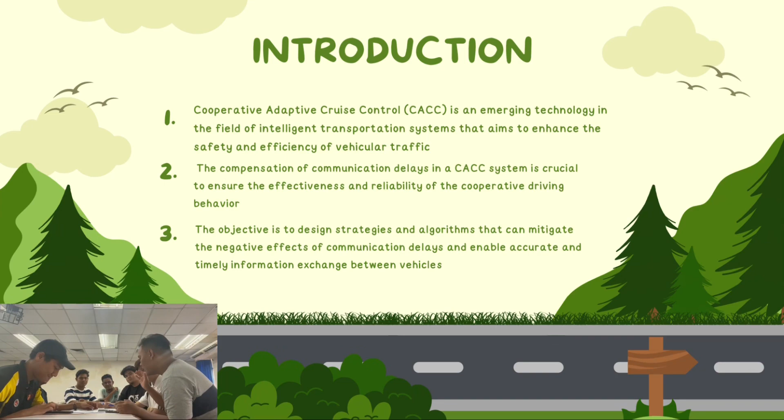We discuss the Group Project 1, Dynamical System. Our Group Project 1 in Dynamical System is on the Routh-Hurwitz criterion. Our chosen topic is compensation of communication delay in a cooperative ACC system. What is an ACC system? The system relies on real-time communication between vehicles to enable coordinated driving behavior and improve traffic flow. However, communication delay significantly impacts the performance and effectiveness of this system.

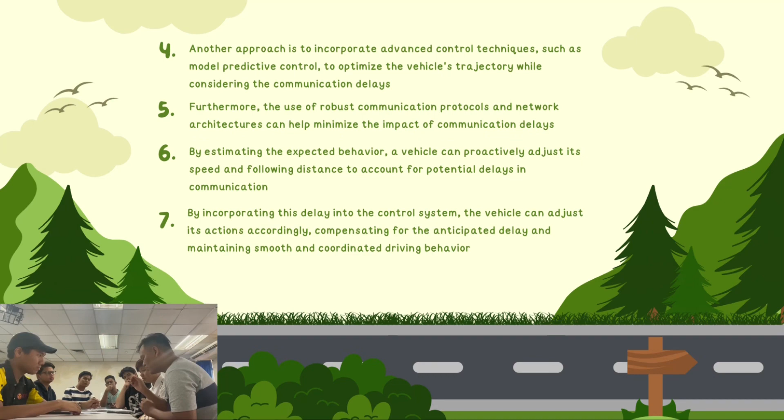For example, if vehicle A predicts that vehicle B is likely to decelerate due to an obstacle based on its previous behavior, it automatically initiates braking to maintain a safe following distance. This prediction and compensation process helps mitigate the impact of communication delay, ensuring that the platoon remains safe and responsive. In summary, the compensation of communication delay is a critical aspect in the development and implementation of cooperative ACC systems on vehicles; by addressing communication protocols it is possible to mitigate the negative effect of delay.

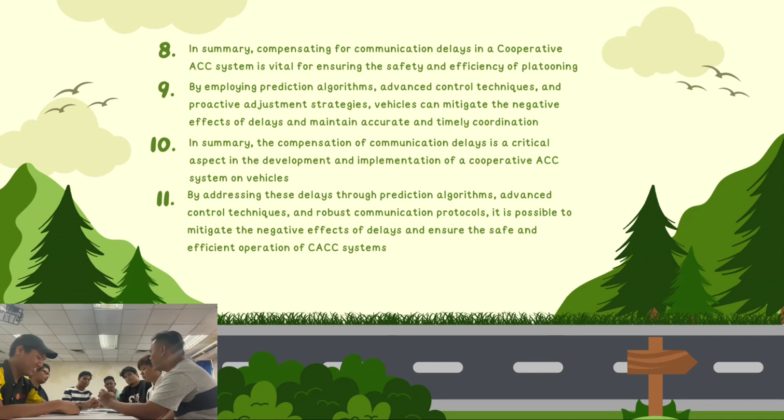What do you think about the problem statement? Okay, my problem statement is as follows. First, the problem addressed in the study revolves around the impact of communication delay on the stability and performance of cooperative adaptive cruise control, the CACC system. Second, communication delay refers to the time lag between sending and receiving information through a communication system. Third, it has been established that such delay can significantly hinder the effectiveness of CACC systems, resulting in poor performance, particularly in real-world scenarios with extreme communication delay.

Lastly, the focus of this study is modeling and control of a cooperative adaptive cruise control system, the CACC system. So, based on your problem statement, the objective of this study is to enhance the stability of the CACC system by mitigating the adverse effects caused by communication delay. The second objective is to understand the relationship between communication delays and system stability and develop strategies to improve performance under various traffic conditions. And the last one is to contribute to the development of reliable and robust CACC systems that can operate efficiently even in the presence of communication delays.

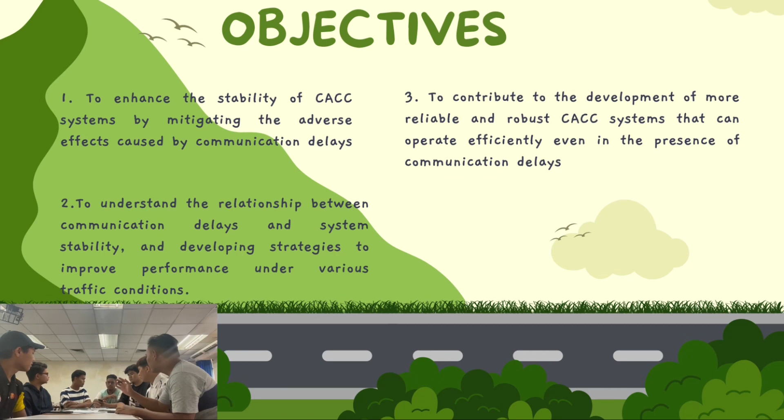Okay, next we continue with the methodology. Before we understand the Routh stability criterion, there are three types of system: the stable system, where all roots lie on the left side of the S-plane; the unstable system, where roots lie on the right side of the S-plane; and the marginally stable system, where roots lie on the imaginary axis of the S-plane.

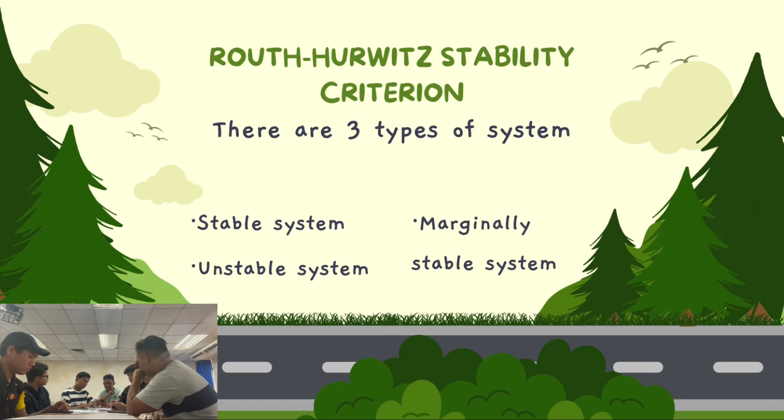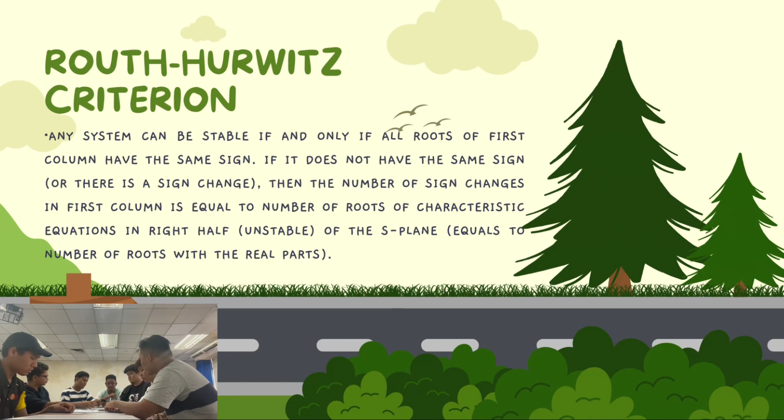The criterion states that a system is stable if and only if all elements of the first column have the same sign. If they don't have the same sign, or there is a sign change, then the number of sign changes in the first column is equal to the number of roots of the characteristic equation in the right half, or unstable region, of the S-plane, which is the number of roots with positive real parts. We can consider the characteristic equation.

There are some necessary conditions to make the system stable: all coefficients of the equation should have the same sign, and there should be no missing term. But there's no assurance that the system is stable just by referring to these properties. To do this, we need to apply the Routh-Hurwitz criterion to assess the system stability. The system is said to be unstable if the predetermined condition is not met.

There are a few advantages of this criterion: we can find the stability of the system without solving the equation, we can determine the relative stability of the system, we can determine the range of K for stability, and we can determine the point of intersection of the root locus with the imaginary axis. There are also a few limitations: the criterion is only applicable to linear systems.

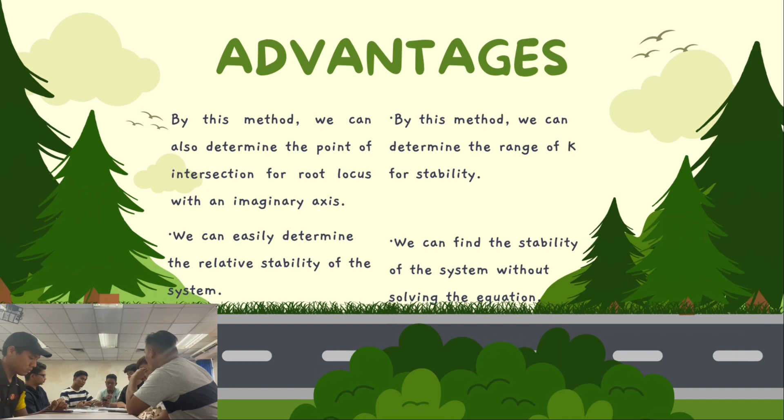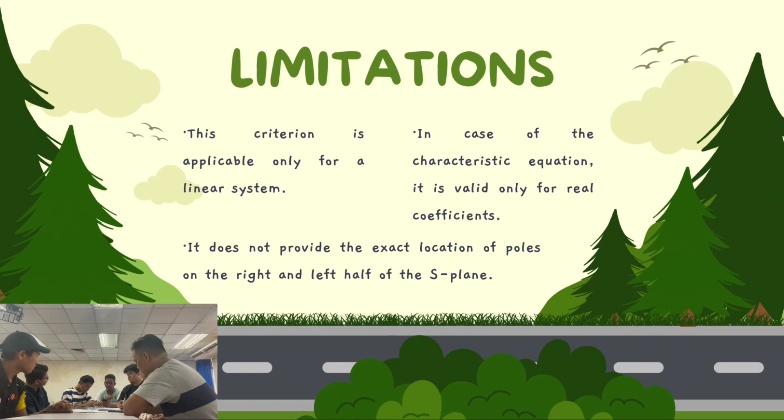It does not provide exact location for the poles in the right half of the S-plane, and in the case of characteristic equation, it is only valid for real coefficients. So there are 4 steps for this Routh-Hurwitz stability criterion.

The first one is to arrange all the coefficients of the equation in 2 rows. Then from these 2 rows, we will form the 3rd row. Now we shall form the 4th row by using the 2nd and 3rd row. Then we can continue this procedure for forming a new row. So let's continue with the solution.

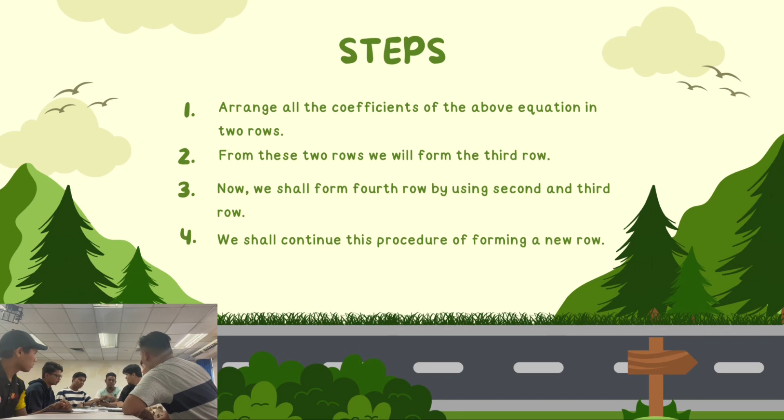Yes, the solution. What do you think? I actually think that we can solve the problem by using the transfer function method. So as we can see from the slide, we have Q, V and A equations.

Whereas AI is the actual acceleration of the vehicle, and theta I represents the vehicle actuator delay, and the third equation, which has the tau there, represents the driveline dynamics, where tau is a time constant. Consequently, the transfer function G(s) from desired acceleration UI to QI reads as this formula.

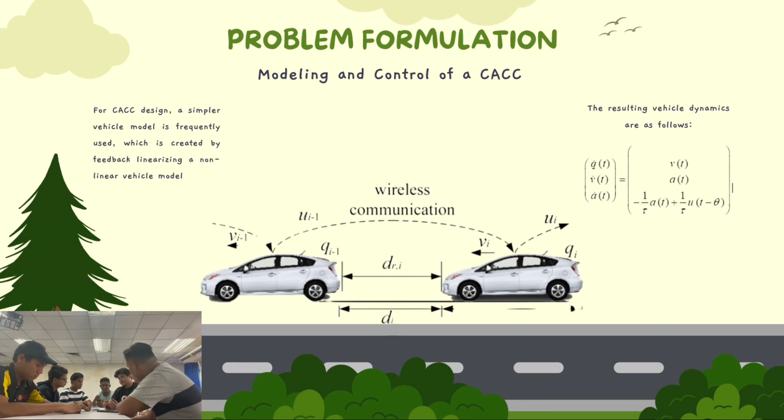On the next slide we have the first equation, where S is the Laplace variable, UI and QI denote the Laplace transform of UI and QI respectively. So for the first equation, we can see where S is the Laplace variable, UI(s) and QI(s) denote the Laplace transform of UI(t) and QI(t).

So for the next equation, which is the second equation, a constant time gap spacing policy improves string stability, and the desired inter-vehicle distance DRI between vehicles involves a standstill distance RI and a velocity dependent part.

So the next step is the third equation, which is the time gap case for a homogeneous CACC string, actual inter-vehicle distance DI. So we continue with the next equation, which explains that to realize the vehicle following objective, the inter-vehicle distance error EI is defined as the equation.

So for the next equation, the controller is adopted, where a pre-compensator with input xi I is introduced. For the sixth equation, to stabilize the dynamics, the control law for xi I.

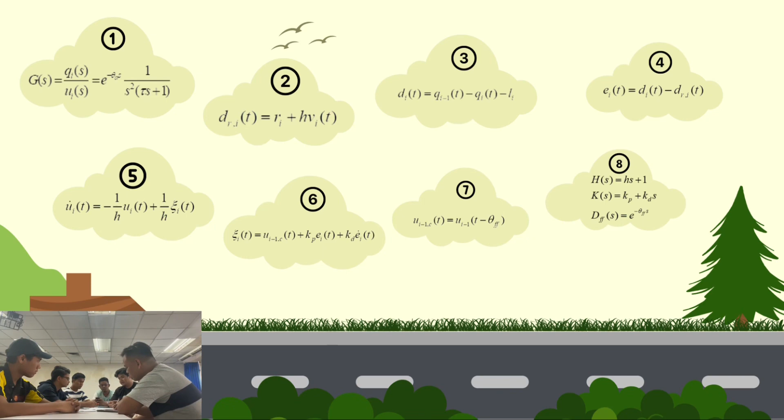For the seventh equation, it states where Kp and Kd represent the controller parameters, Ui minus 1 is the received desired acceleration of the preceding vehicle. And the eighth equation, which has the H, K and D, explains that without loss of generality, we choose Ri, Li equal to 0 when analyzing stability and string stability. That's why the CACC system of homogeneous interconnected vehicles is string stable.

And the last one we can see from the slide is considering, for instance, the desired acceleration, the transfer function for S(s) from UI-1 to UI. As you can see from the slide, here we have the block scheme of the one vehicle look-ahead CACC system. Here we introduce the string stability of this one vehicle look-ahead CACC system, adopting the so-called performance-oriented approach, which is characterized by amplification in upstream direction of the signal of interest.

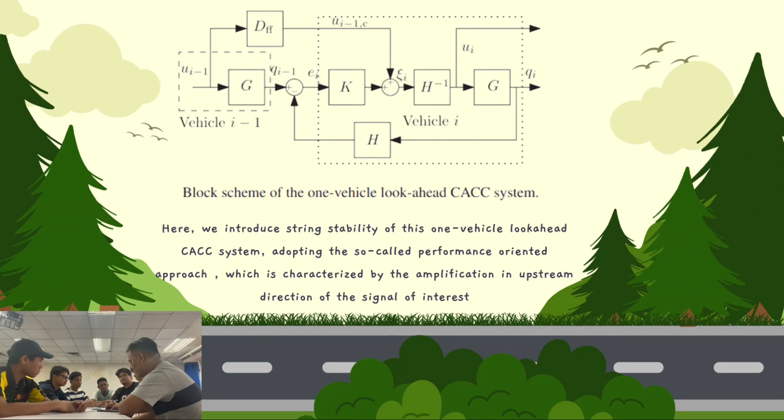So we can go to the problem solution, which actually uses the dynamical system approach. So Johan, do you mind to explain? So as for the example and solution, I already provided the solution. So basically for the solution, firstly we have to provide a few equations that satisfy the form of x dot is equal to f(x).

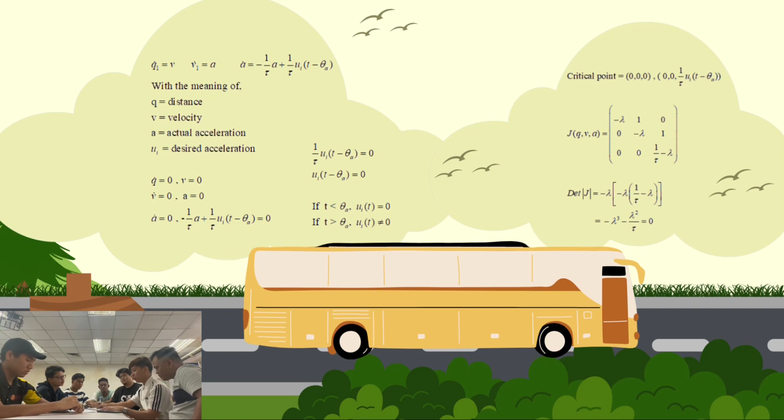So I found three equations related to our research, such that q dot is equal to v, v dot is equal to a, and a dot is equal to negative 1 over tau a plus 1 over tau ui(t minus theta), such that q is distance, v is velocity, a is actual acceleration, and ui is desired acceleration. So for the first step, for the Routh-Hurwitz method, we need to find the equilibrium point, such that firstly we need to set q dot equal to 0, so we will get v is equal to 0.

Then we find for v dot equal to 0, and then we're going to get a is equal to 0, and lastly a dot is equal to 0. Then we will get 1 over tau u_i(t minus theta a) is equal to 0. So based on the paper that I have followed, if t is less than theta a, then u_i(t) is going to be 0. Then if t is more than theta a, then u_i(t) will be not equal to 0.

So based on the condition, I already get the equilibrium point or the critical point is (0, 0, 0), referring to the coordinates of q, v, and a. So for the next step, we're going to find the Jacobian matrix, and then we're going to substitute the equilibrium point into the Jacobian matrix. Then for the diagonal of the Jacobian matrix, after we substitute the values, we're going to subtract lambda to find the eigenvalues. After we finish that step, we're going to find the determinant of the Jacobian and equate it to 0.

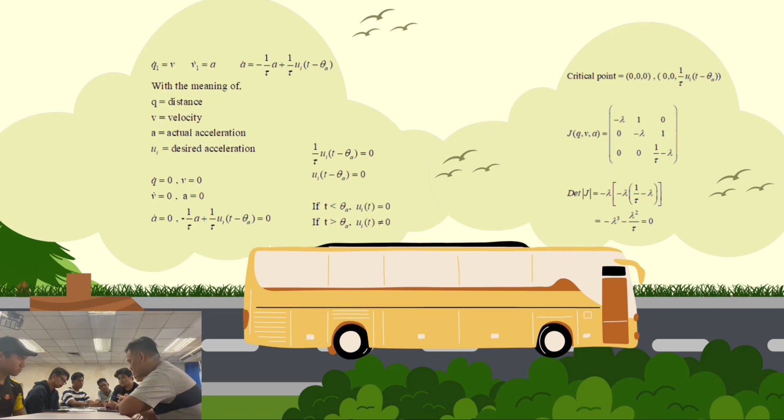Then we're going to get the characteristic equation, which is lambda cubed plus lambda squared over tau is equal to 0. So based on the Routh-Hurwitz criterion, we compare the characteristic equation with the general form of the characteristic equation, such that we get a1 is equal to 1 over tau, a2 is equal to 0, and a3 is equal to 0. After we get a1, a2, and a3, we're going to find the matrices Hj. So we're going to have three matrices, which are H1, H2, and H3.

So H1 is equal to the matrix of a1, which is 1 over tau, and the determinant when we calculate is greater than 0. For H2, the form of the matrix is a1, 1, 0, and a2. Then we substitute the values of a1 and a2, and if we calculate the determinant of H2, we're going to get 0. And lastly, for H3, the form is a1, 1, 0, a3, a2, a1, 0, 0, and a3. We calculate the determinant, and we also get the determinant of H3 is equal to 0.

So based on the Routh-Hurwitz criterion, the determinant of Hj for the stable condition should be greater than 0. But in this case, only the determinant of H1 is greater than 0. For the other determinants, we only get 0. So based on the condition, we can conclude that the system is unstable.

So, what can you say about our discussion? To conclude our discussion today, it highlights the significance of the CACC system, the challenge of communication delays, compensation strategies, and the importance of stability analysis. This discussion emphasizes the goal of ensuring safe and stable driving behavior, and the objective to contribute to the development of more robust CACC systems through comprehensive stability analysis,

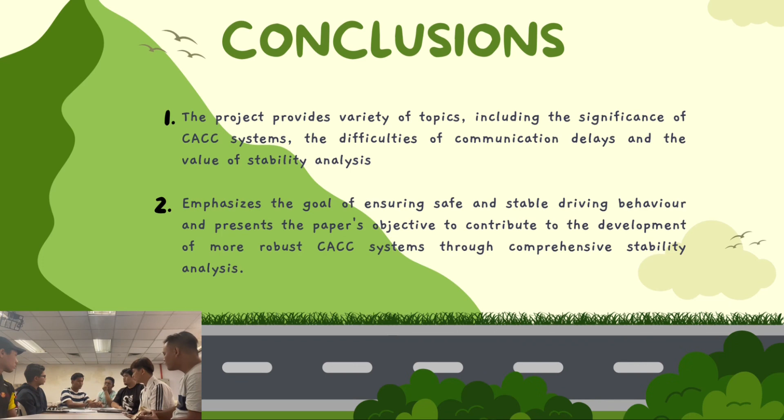as has been done by Johan. The problem statement focuses on the importance of communication delays in the CACC system, identifies their negative effects, and emphasizes the need to enhance system stability by mitigating these negative delays. So the research will likely seek to provide a solution that improves the performance of the CACC system in real-world scenarios with varying levels of communication delays.

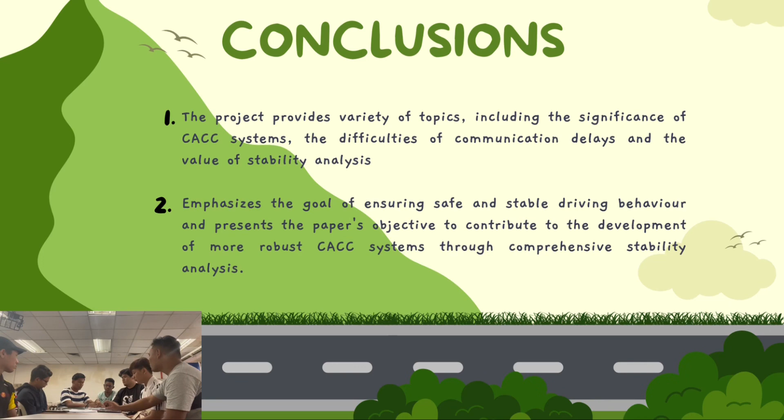The Routh-Hurwitz criterion method allows us to determine the stability of a system by examining the sign and number of sign changes in the first column of the Routh array. If all the signs are the same, the system is stable. If there is a sign change, the system is unstable.

The research aims to address the adverse effect of communication delays in the CACC system by understanding the impact on system stability and developing strategies to improve performance. The goal is to contribute to the development of a more reliable and robust CACC system that can operate efficiently under various traffic conditions, including scenarios with communication delays. I think that is the conclusion for our discussion today.